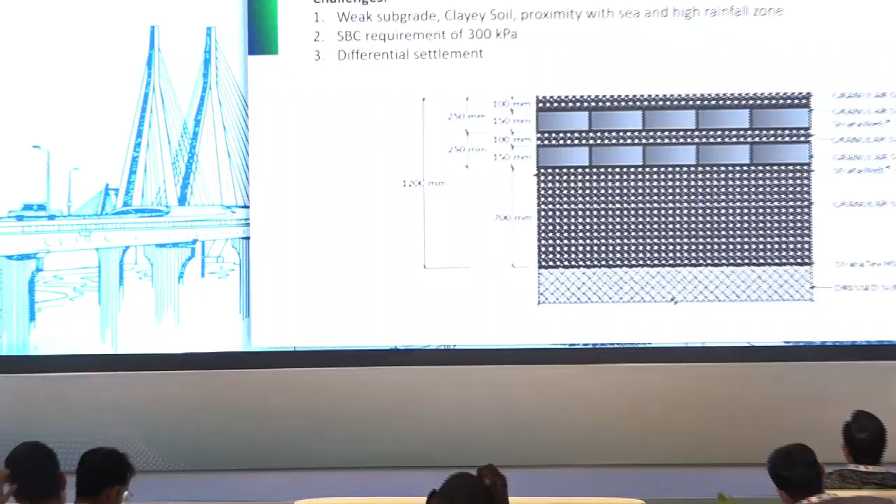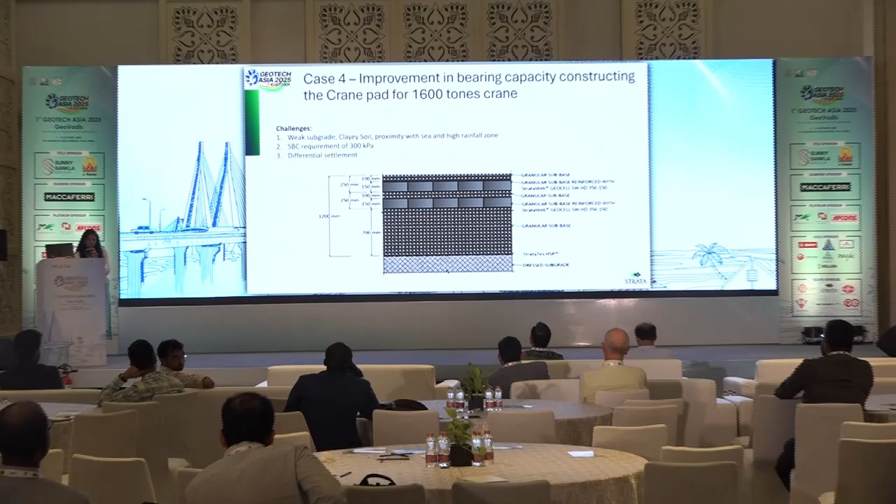This was very interesting, but though I didn't have much of the cases or much of the soil properties to give you a lot of inside information, which we are collecting, this particular crane pad was supposed to have a 1600 tons crane, and that required a soil bearing capacity of around 300 kPa. This was very near to the sea area and a very heavy rainfall area. Subgrade was quite weak. So if we are looking at the overall section, it's 1.2 meter, including the geocell layer.

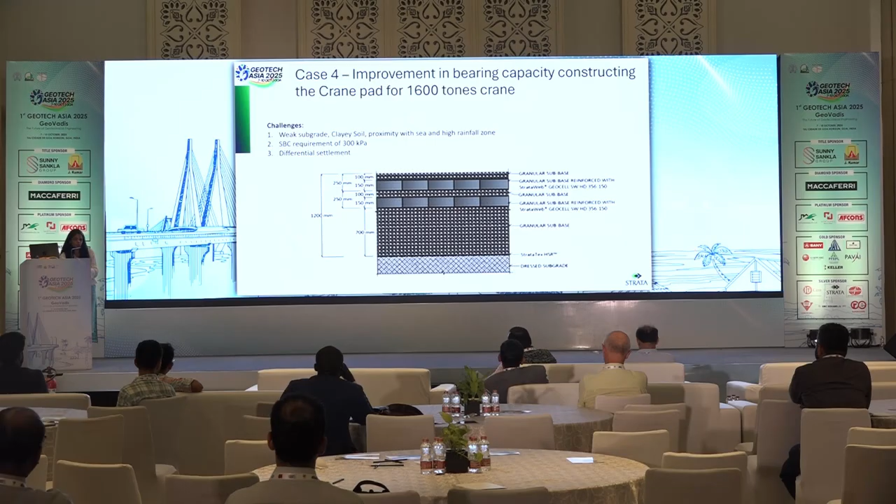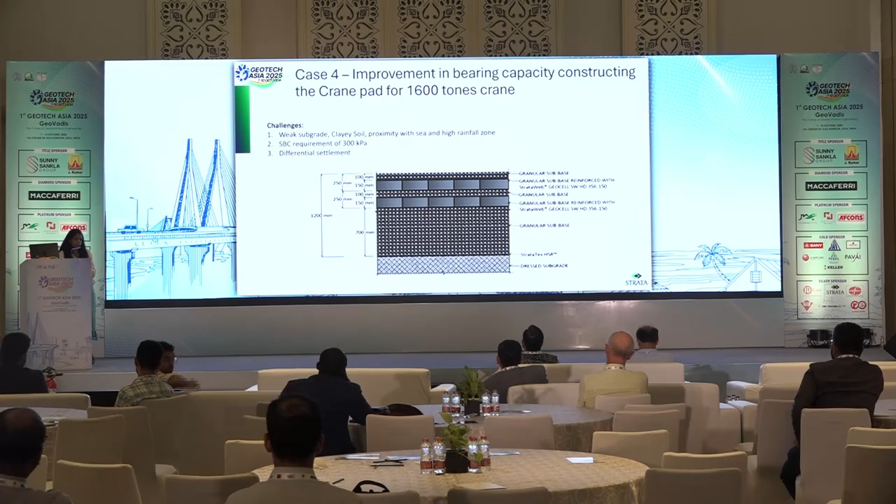So the geocells performance for these heavy loadings has been going on very well and proving very well. It's less maintenance work. We are not hearing anything from there after almost 4 or 5 years since we installed it. So it's going quite well here.

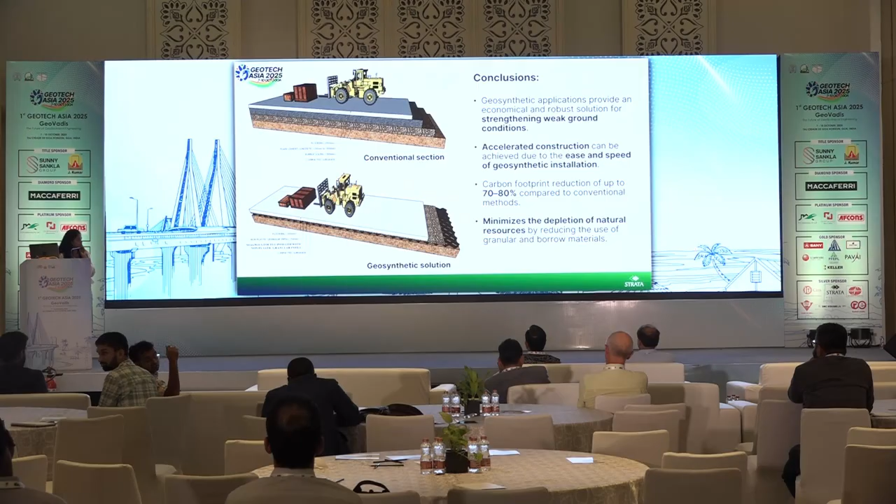In conclusion, geosynthetic products like woven geotextile, high-strength geogrids, and geocells help in strengthening the weak ground, improve its soil-bearing capacity, with quite faster construction compared to the conventional material. Energy conservation is quite a lot. We do have a lot of parameters and equations to check how much carbon footprint we can reduce. Whenever we are checking it, we are at least coming to 70 to 80%. So that's how I've written a figure of 70 to 80% in most of the cases for carbon footprint reduction. Of course, it minimizes the depletion of natural resources.

The benefit of using these materials: it's a green solution, rapid installation, and we have seen it can carry extremely heavy machinery. There is vertical stress dispersion at a larger depth for the weak subgrades, marginal maintenance, and enhanced life. And of course, it's a factory-made product, so quality control is quite possible compared to other solutions. And economical; of course, nobody will come to us if we are not giving economical and technically viable solutions. So whenever we talk about geosynthetics, everybody has to put across some factor for the economy of it. So this is something regarding it.

Very nice, Shabana. Wonderful. Thank you, sir. Any one or two questions? Okay. I have one or two things.

First of all, I should appreciate that you have given some information regarding the application part, with 4 cases. Can you summarize or give a glimpse of what bearing capacity increase you expected in case 2, where you have gone for that 5 container stack? You said soft clay improvement, and that bearing capacity increased. From what value to what value? Even that soft clay, where the requirement is 300 kPa, what is the original bearing capacity of the soil?

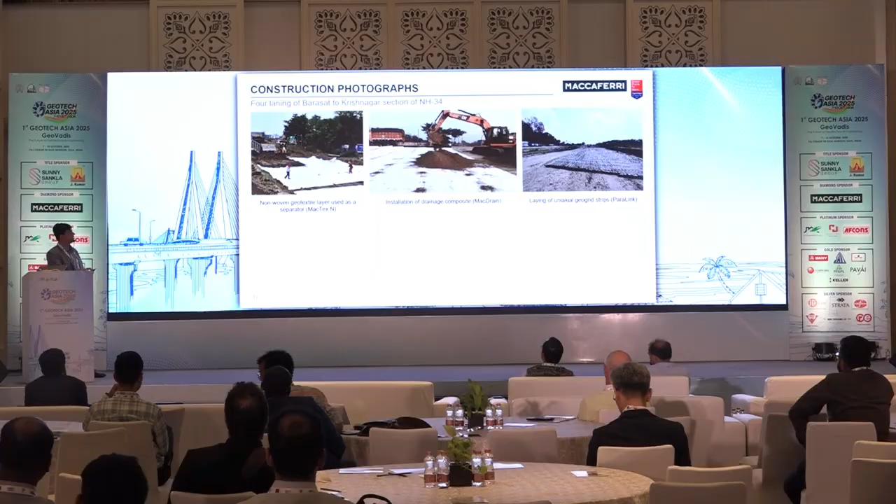Okay, thank you for the presentation. Any questions from the audience? Yeah, one question. Sir, can you please go to your table, basic characterization? Basic characterization. Sorry? Basic characterization, that table. That liquid limit, plastic limit. Sure. Yeah. This one, yeah. Let me check, sir.

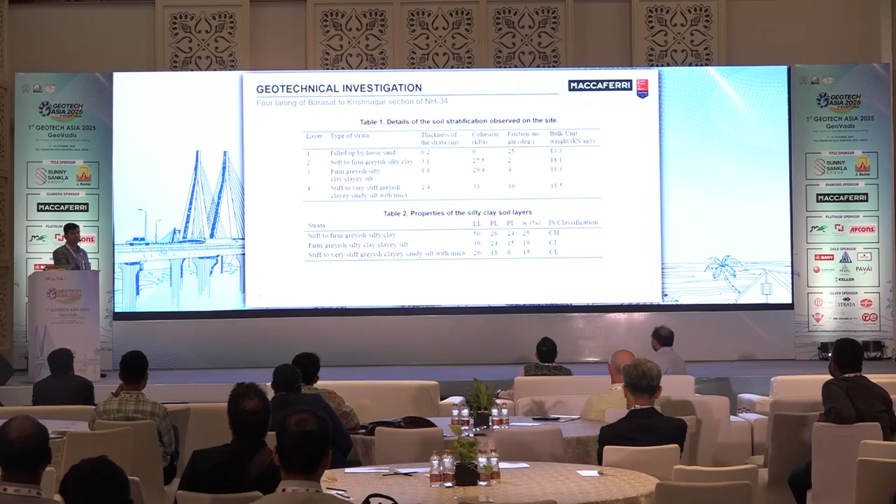So based on what have you classified it as CH, CI and CL? That's basically, if you look at the plasticity index, which is 20 plus, as well as the observations from the, let me just take you back, the site observations in terms of the gradation also, silty clay, plus the plasticity index, and then observations which were informed by the contractor and the department over a period of time. That's how we arrived at that.

And with the help of that A-line, that chart. Yeah, plasticity chart. Basically, we know the Atterberg limits, and from there we can understand these things. Yes, sir. So thank you, sir. Thank you. And thank you for your wonderful presentation. Thank you very much.

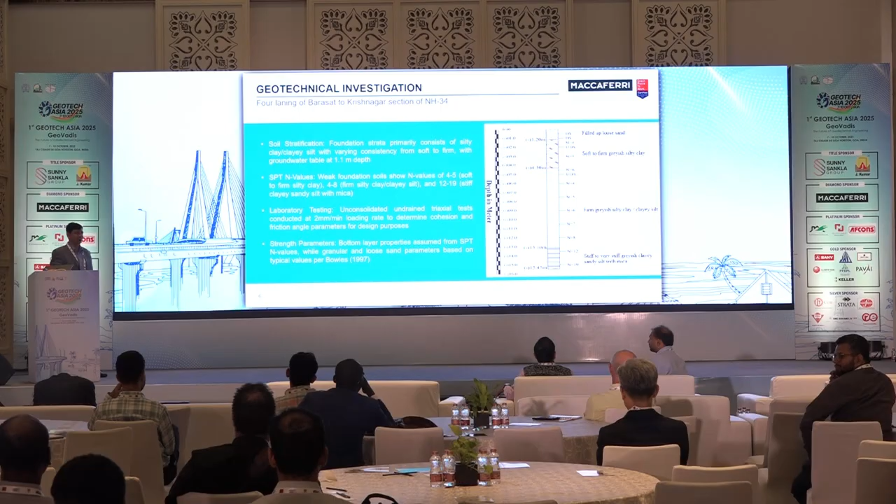Thank you, Dr. Ratnakar. So the next presentation will be on pull-out behavior of reinforcement and reinforced earth wall by Ankit Kumar. Hello, good evening everyone. Today I am presenting on pull-out behavior of reinforced earth wall. This work was carried out by M.Tech student Vishnu. I am presenting on his behalf. So this will be my content: introduction, objective of the present study, methodology, numerical modeling of geosynthetic reinforcement pull-out test, and conclusion.

Introduction. RE wall is a type of retaining wall where the backfill soil is reinforced with suitable reinforcement to provide stability. There are two types of reinforcement, extensible and inextensible, used in RE walls. Internal stability analysis is done for design of reinforcement. Pull-out resistance of reinforcement is an important design consideration for the internal stability of RE wall. Field pull-out tests are required to check whether the required resistance is achieved in actual or not.

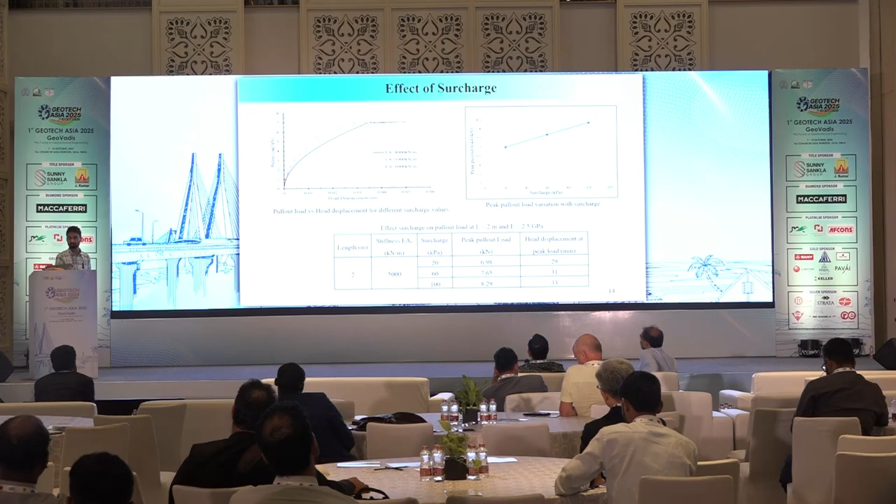No, I already told you it's limited considering the serviceability criteria. For that, we have to do field pull-out tests. It's already told here: displacement required is much higher for a larger length of reinforcement, which generally may not be permitted as per serviceability limits. So pull-out design should be done accordingly by conducting field tests.

Okay. And last question. Can you please go to your title page? Title page. Yes. So for this you are using that computer code Plaxis? Yes, Plaxis. 2D, 3D, 1D? 3D. So is it a FEM model or FD model? FEM model. And I saw you are mentioning stiffness, that word.

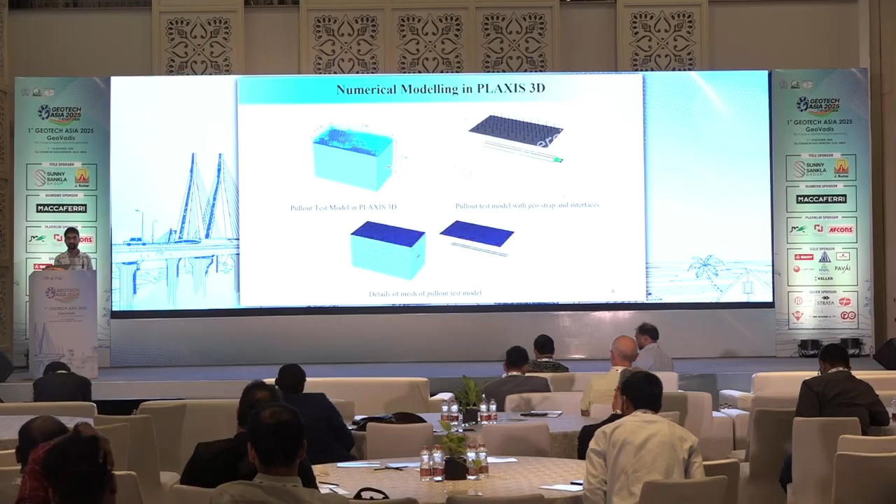So I have something to ask you about the basics. Can you define stiffness? What do you mean by stiffness? Stiffness, how are you asking? What do you mean by stiffness? You are giving some value. Yes. If we have length, if we divide by the thickness, that we're getting stiffness. Length, no, sorry, load by thickness.

It's okay. I think we can discuss. So basically, this work was not carried out by me. It's carried out by some MTech student. I'm presenting on his behalf. Okay. Thank you for a nice presentation. Thank you, Ankit.

The next presentation is on numerical analysis of geogrid reinforced soil walls subjected to pseudostatic seismic loading by Dr. Saugata.

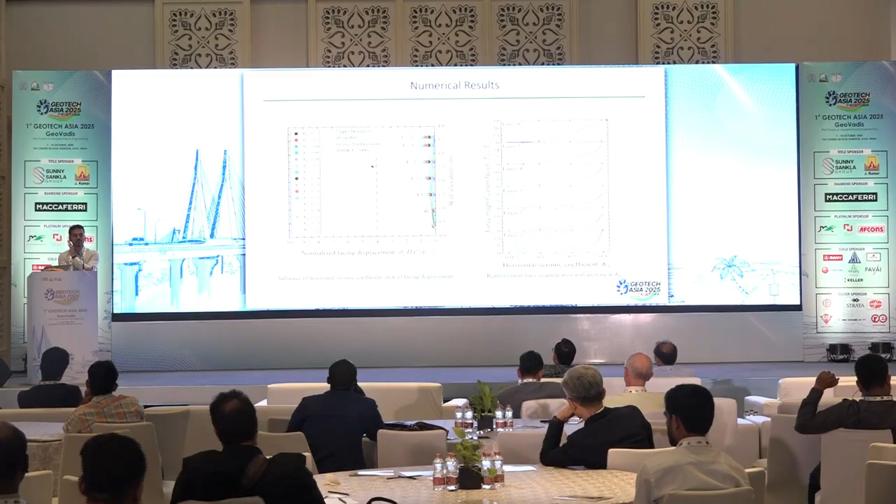So which also leads to an unsafe design of the wall. So here you can see the wall deformation with increased earthquake loading. Initially, during the static condition or even at lower values of the pseudostatic earthquake loading, the wall is bulging, and you can see the maximum wall deformation at around 0.6H or so. But when the earthquake force is increasing, you will see that the wall is rotating. The base is almost at its place, and the top of the wall is moving away. So it will have a rotational kind of movement.

Similarly, we have seen that the reinforcement strains, which are almost less than 1% under the static conditions, will increase, and can reach even up to 5% under seismic conditions, and in some cases it can even go to 13%. Similarly, the tensile force in the reinforcement will also increase, and with increased seismic intensity, the magnification factor can go up to even 30-35. And the maximum magnification is observed at the top of the wall, where the wall will have the maximum deformation.

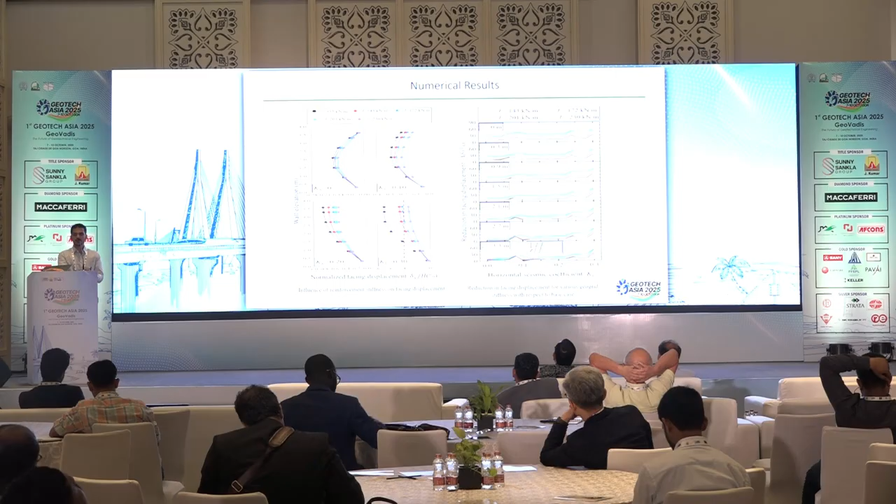After that, we have done some parametric analysis by varying some parameters, and our objective was to see whether the deformations could be reduced by some parametric adjustments. The first one was changing the reinforcement stiffness, and we have seen that increasing reinforcement stiffness of course has a positive effect on the wall deformation. With increase in the coefficient, the reduction in the wall deformation is linear. At the same time, in the static case also, you will have a reduction in the wall deformation with increased reinforcement stiffness. And the percentage reduction could be even up to 60% at seismic condition.

The next one was increasing the reinforcement length, and we have doubled the reinforcement length in stages. That is, first we doubled the length in the top layer, then in the next case in the next 2 layers. Likewise we did for the top 4 layers. What we have observed is that only for the top 2 layers, that is a height of 1/3 of the wall, it is beneficial to increase the reinforcement length. After that, even if you increase the reinforcement length, it will have very less effect on the wall deformation. So that is not beneficial.

Another crucial observation is that you can see from the percentage reduction that there is almost 0 reduction in the wall deformation up to an earthquake coefficient kh equal to 0.2g. It is only beyond 0.2g, that is a very intensive earthquake, that the reduction will happen.

The final one is on the reduction of the reinforcement vertical spacing. Here we can see that the percentage reduction increases with increase in the seismic load, and of course even at static condition you will have some reduction. One more observation we made is that it has the highest benefit at the top of the wall, that is where the wall is moving away.

So coming to the results, generally the numerical results agreed to a great extent with the experimental results, and if we check the displacement along the coir geotextile, we can see the displacement was different along different parts of the geotextile, and it was higher near the clamp end.

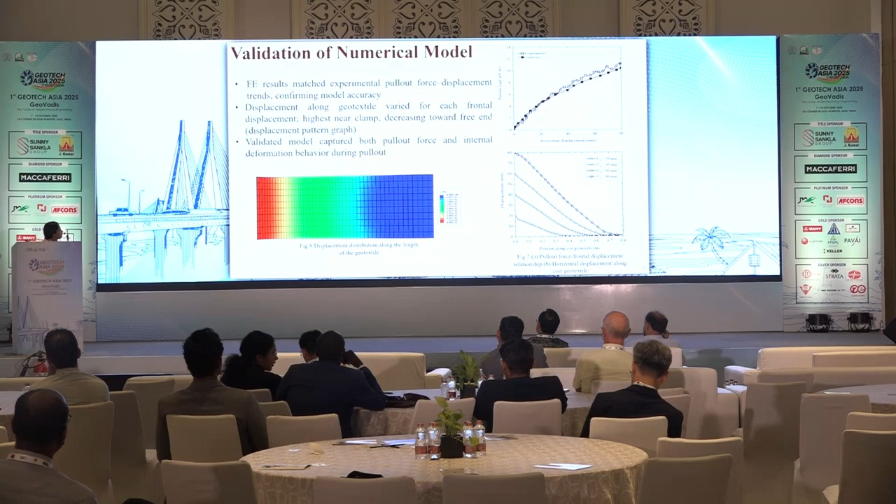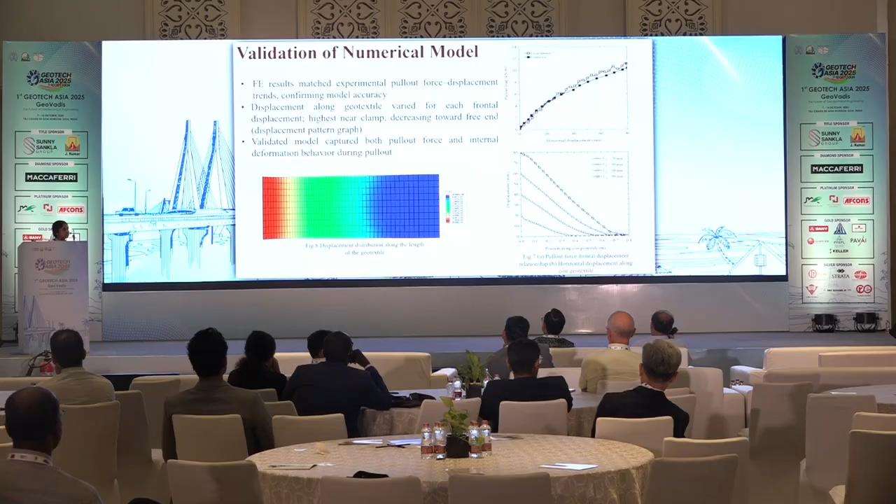This is the displacement distribution along the length of the geotextile. We were able to get the tensile stress pattern as well. Coming to the conclusions, MMA grafted coir geotextiles showed around 50% higher pull-out strength than the unmodified one. Their improved durability will make them a strong candidate to replace synthetic geotextiles. Then the FEM model accurately captured the experimental data, and this can be used for later parametric studies as well.

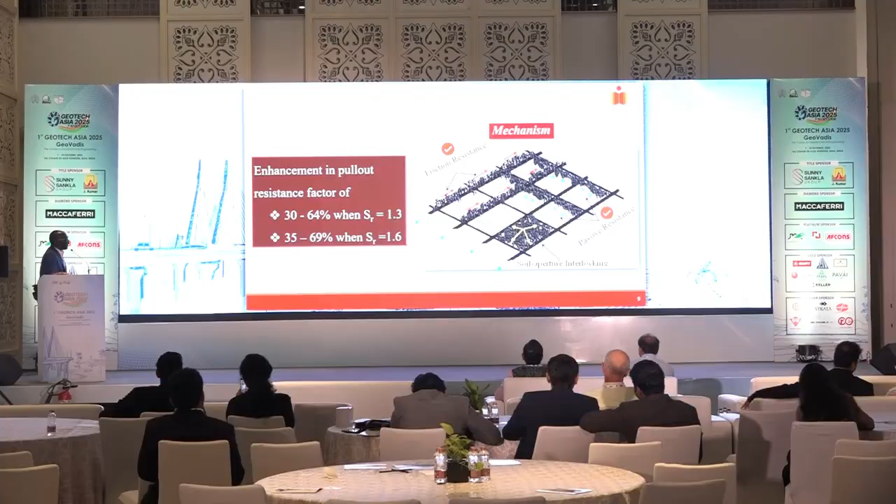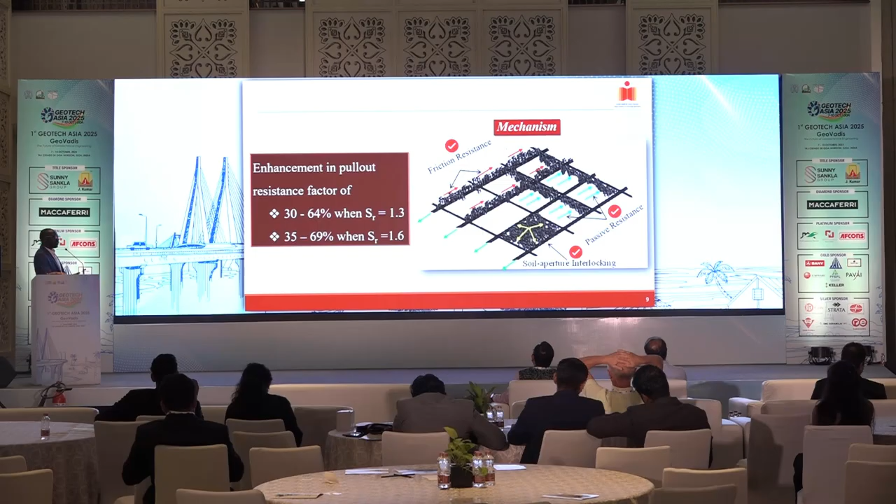The mechanism of this behavior is, we know that the interaction between soil and geogrid depends on the friction resistance between soil and geogrid surface, the passive resistance against the transverse ribs, and the soil interlocking in the geogrid apertures. So when we increase the spread ratio, that means we increase the friction area, we increase the passive resistance, or we increase the transverse ribs, and also we increase the interlocking apertures. So that will affect the overall pull-out resistance.

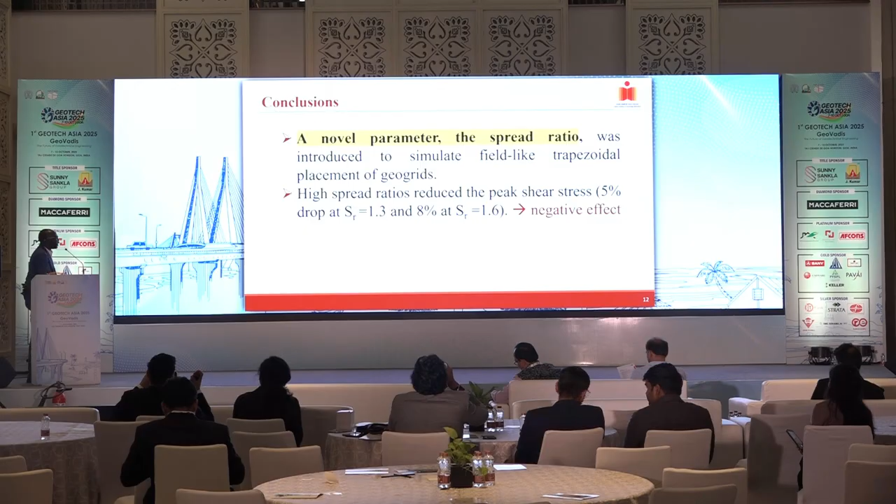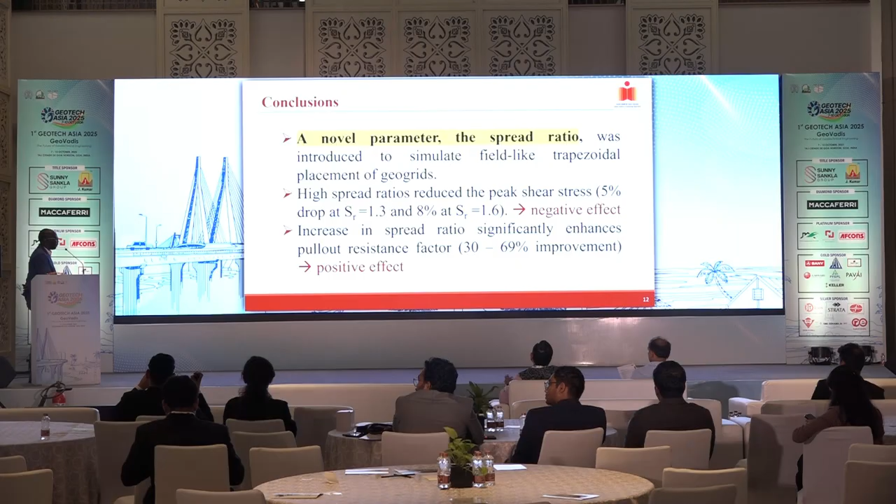Our conclusion: a novel parameter, the spread ratio, was introduced in this research. Higher spread ratio reduces the peak shear stress, up to 5% drop at SR equal to 1.3 and 8% at SR equal to 1.6, and that is a negative effect. And for pull-out resistance, increasing the spread ratio significantly enhances the pull-out resistance factor, with 30% to 69% improvement, and that is a positive effect.

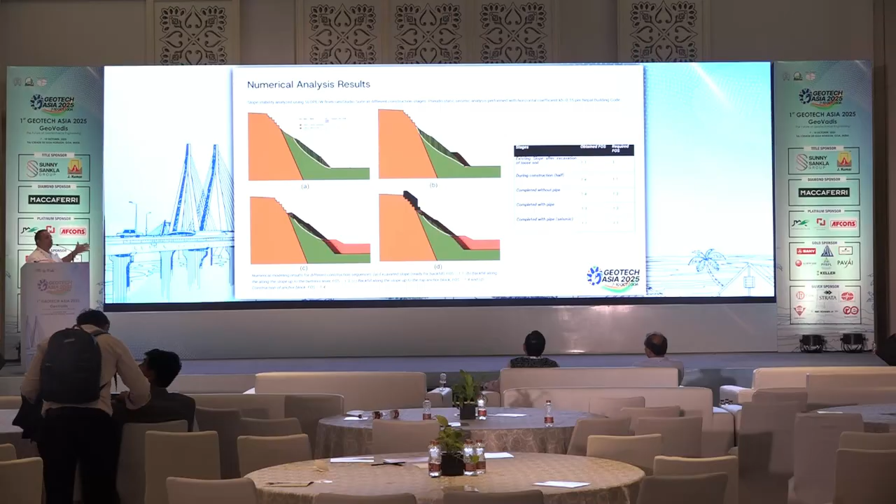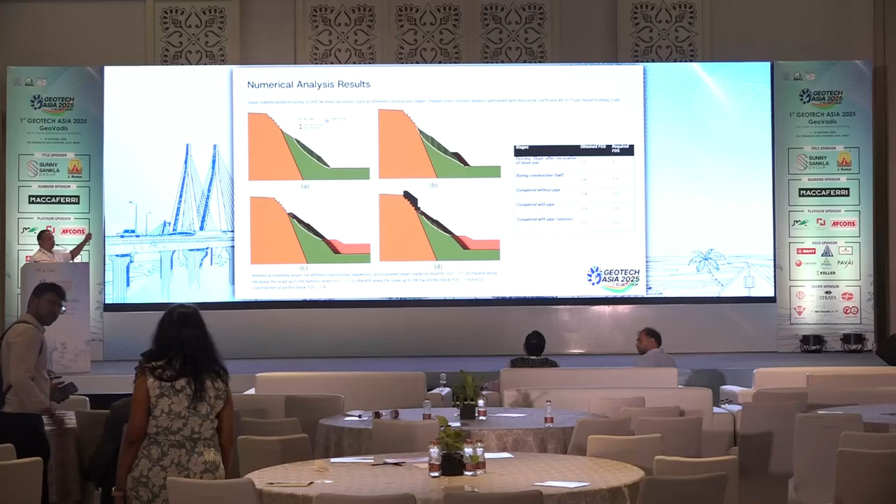The design was carried out using GeoSlope software, and all the checks were done for different stages of construction. First, of course, starting after the excavation was carried out of the loose soil, then when the reinforced soil structure was completed up to mid height, what was the factor of safety, followed by the full construction of the reinforced soil structure, and then D is the one wherein the pipe is also installed, okay? And then, yes, the static and seismic analysis were definitely carried out.

And the confidence of going with this solution started with a case study in Lower Likhu hydropower project, wherein a similar reinforced soil structure was implemented for a 40-meter high penstock slope above the road. This was completed in 2020, and we have seen in recent times how monsoons are getting worse and worse. So this has been able to bear the brunt of very disruptive monsoon seasons across a few years, and has been delivering well. And that gave the confidence for adopting this for even an 80-meter high slope.

In terms of recommendations, we should avoid disposing the muck on such slopes, for sure. We can consider geogrid reinforcement for such application areas, implement drainage, and yes, it is very important to do stage-wise numerical verification so that we are sure that at all stages of construction we are safe. So yes, the successful stabilization of this slope demonstrates that geogrid reinforcement does offer an economical, time-efficient solution for challenging hydropower projects. That's it from my side.